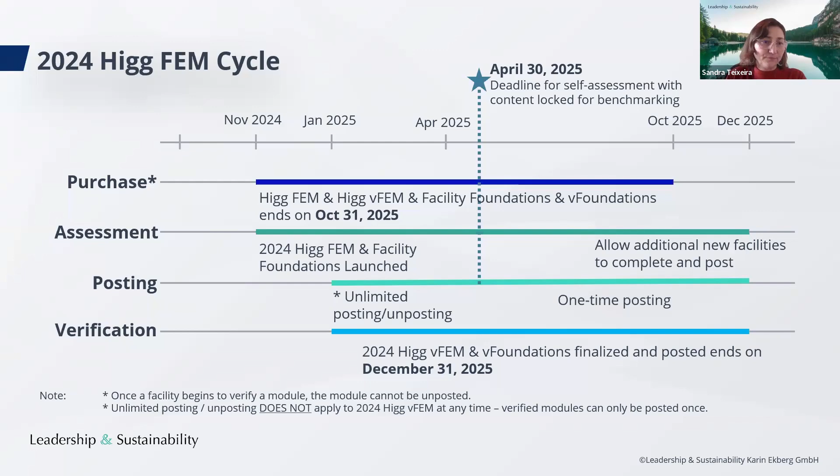So looking into the changes from FEM in the cadence 2023-2024, new changes in the Higg Facility Environmental Module represent a significant step forward in advancing how we measure, report, and improve environmental performance across the textile, apparel, and footwear industries. These updates are designed to refine the assessment process, enhance data accuracy, and align the framework more closely with global sustainability and regulatory expectations.

So we anticipate a collaborative effort in navigating these updates. Looking then into the air emissions section, here we can see the trail overview. We already covered site info and permits, the environmental management system, energy and greenhouse gas emissions, water use, and wastewater, and today's focus will be on air emissions.

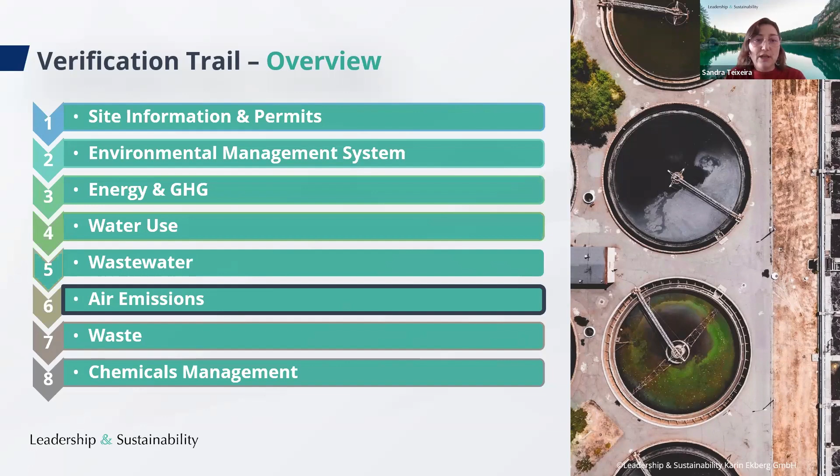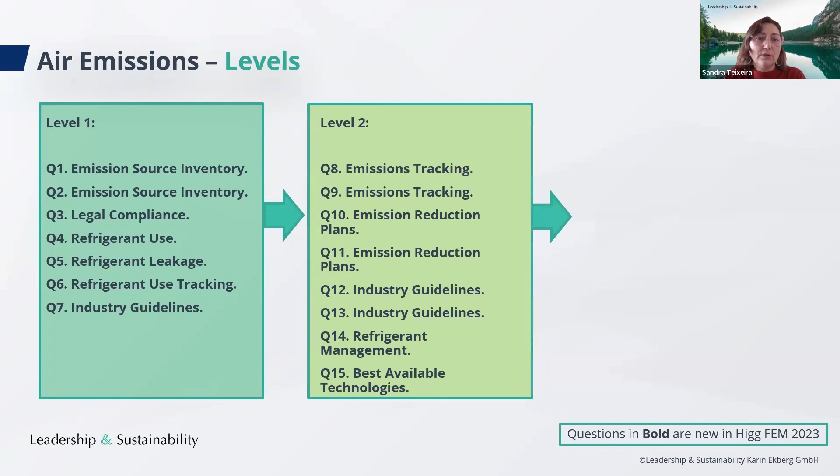As usual, I'm looking into the levels of questions. We have questions distributed by 3 levels: level 1, level 2, and level 3. In the air emissions section, there were no new additions in the cadence 2024. So here the questions that you see highlighted were new adds in the cadence 2023.

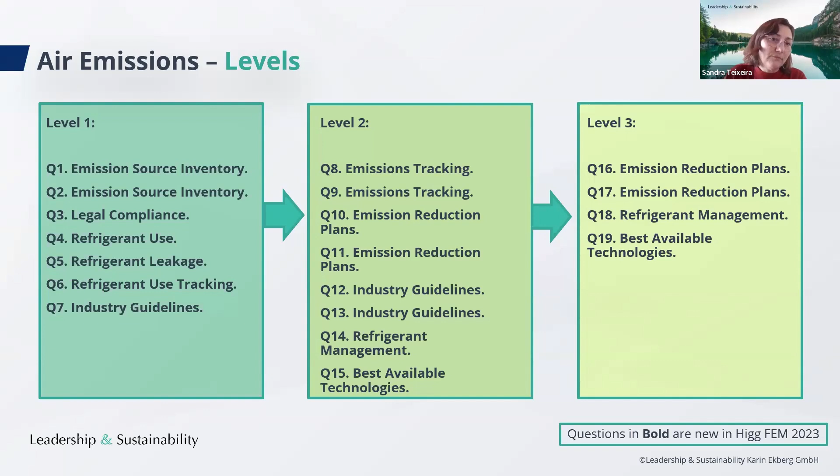As an introduction, air emissions from industrial processes and manufacturing operations have the potential to emit pollutants into the air that impact the environment, human health, and contribute to climate change. By proactively managing and working to reduce the impact of your facility's air emissions, you can reduce your exposure to regulatory risks or new requirements from business partners.

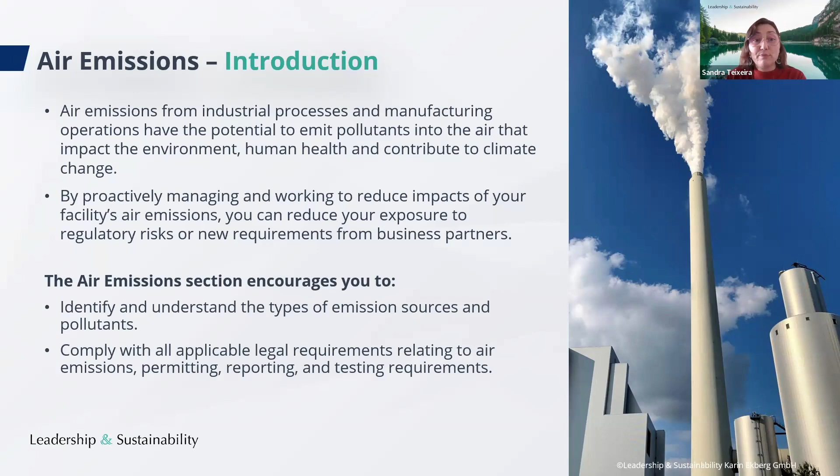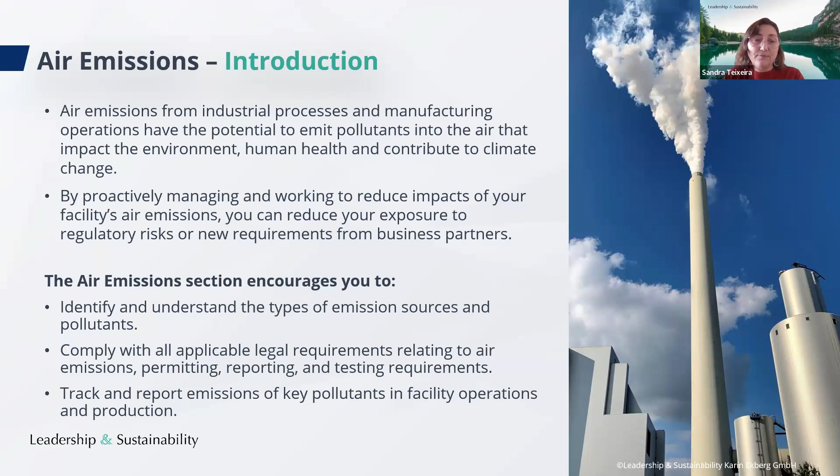The air emissions section encourages you to identify and understand the types of air emissions and sources of pollutants, comply with all applicable legal requirements relating to air emissions, permitting, reporting, and testing requirements, track and report emissions of key pollutants in facility operations and production, and adopt the best available technologies, including materials, processes, and equipment, to minimize emissions to air.

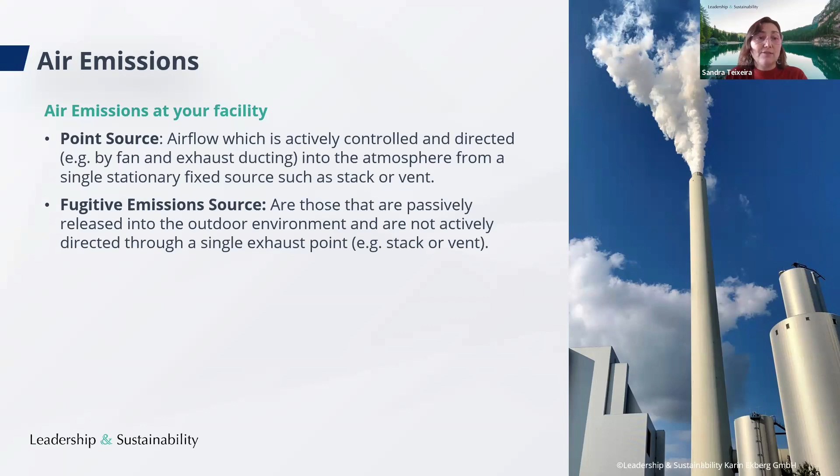Regarding emissions at your facility, you can have point source emissions, which are airflow actively controlled and directed by a fan or exhaust ducting into the atmosphere from a single stationary fixed source, such as a stack or vent. Also, you have fugitive emission sources, which are those passively released into the outdoor environment and not actively directed through a single exhaust point like stacks or vents.

Also, you have mobile emission sources, which are non-stationary sources of emissions, like motor vehicles, heavy machinery, and small engines, including forklift trucks and passenger vehicles.

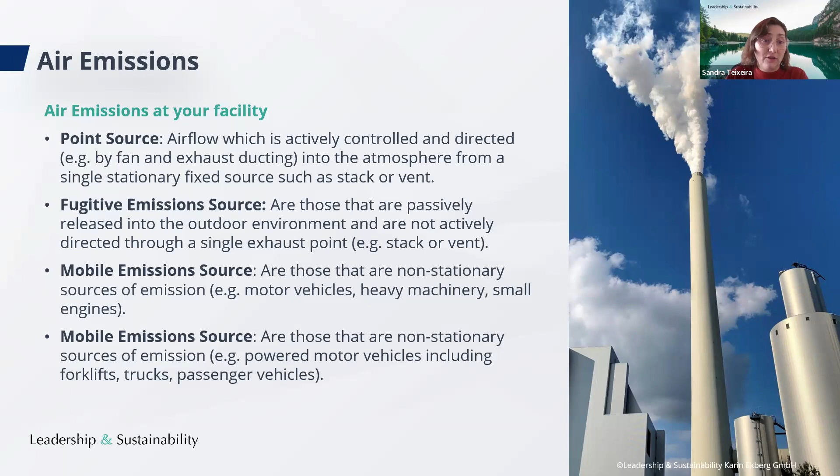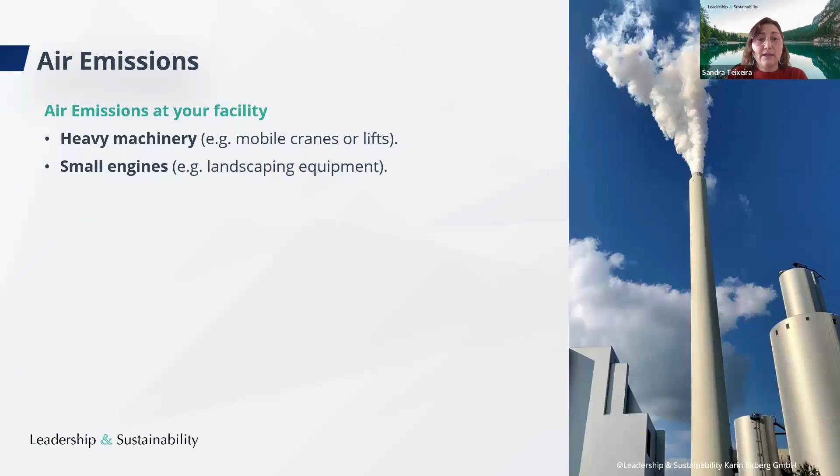Also heavy machinery like mobile cranes or lifts, small engines like landscaping equipment, and air emissions that you have in your facility. Further, it categorizes the emissions based on the nature of the emission sources, starting with emissions from facility operations, which include emissions from sources that support facility operations and are not a direct result of production processes.

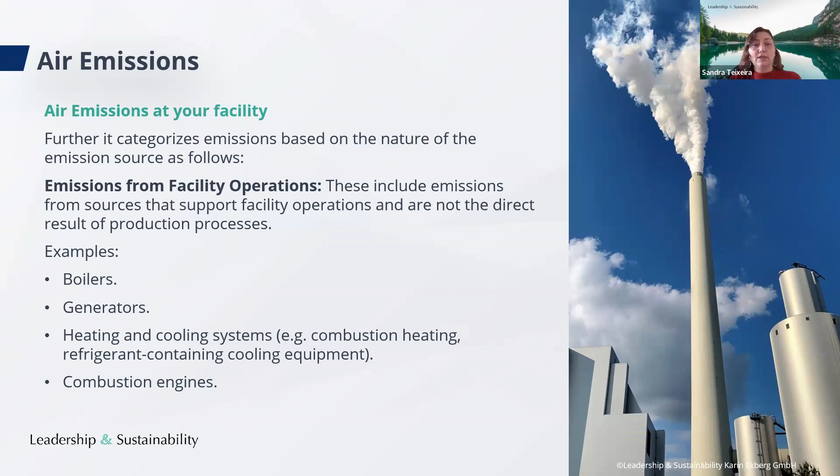As examples, we have boilers, generators, heating and cooling systems, combustion heating, refrigerant containing and cooling equipment, and combustion engines also.

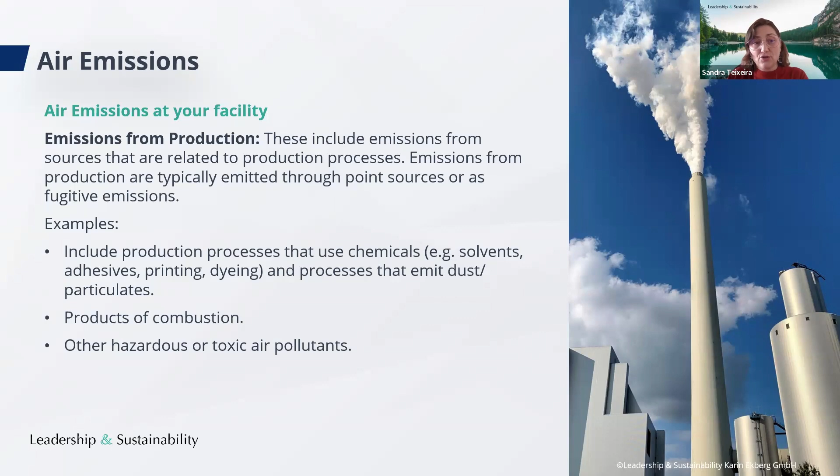Also, emissions from production - this includes emissions from sources that are related to production processes. Emissions from production are typically emitted through point sources or as fugitive emissions. Examples include production processes that use chemicals, solvents, adhesives, printing, dyeing, and processes that emit dust or particles, products of combustion, and other hazardous or toxic air pollutants.

Here we can see the pollutants emitted from operations: particulate matter, nitrogen oxide, sulfur oxides, carbon monoxide, volatile organic compounds or total organic carbon compounds, hazardous or toxic air pollutants, and pollutants emitted from production processes.

You also have particulate matters, nitrogen oxide, sulfur oxides, carbon monoxide, volatile organic compounds or total organic carbon, hazardous or toxic air pollutants, ammonia, ozone depleting substances, carbon disulfide, and hydrogen sulfide.

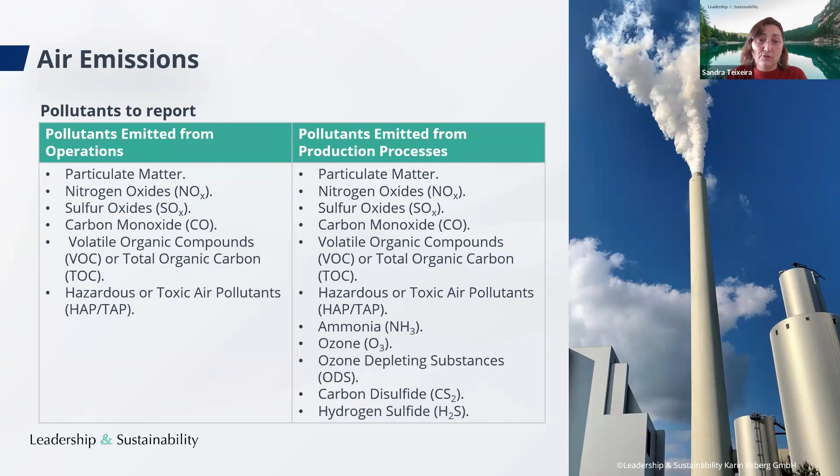Looking at the best available technologies - best available technologies are defined as the most effective and advanced technology, materials, process and equipment available that will result in reduction of pollutants emitted.

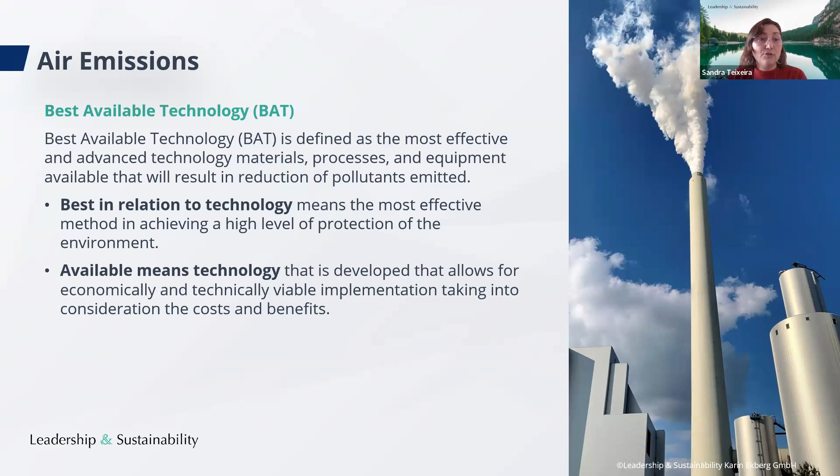'Best' in relation to technology means the most effective methodology in achieving a high level of protection of the environment. 'Available' means technology that is developed that allows for economical and technical viable implementation, taking into consideration the costs and benefits. Also, technology refers to materials, process, and equipment, and the way it is designed, built, maintained, and operated.

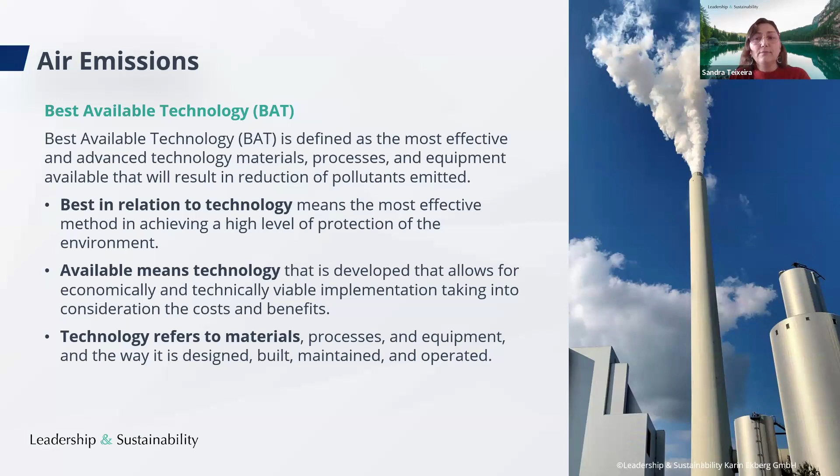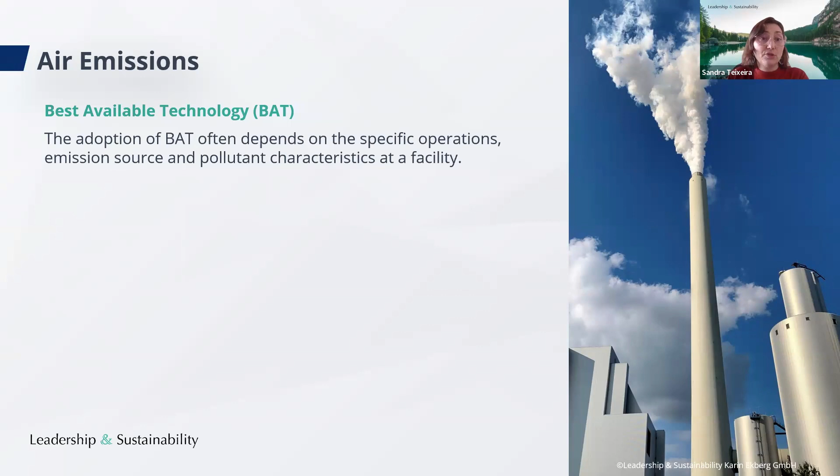The adoption of best available technologies often depends on the specific operations, emission source, and pollutant characteristics at your facility. For example, in some cases the most effective current solution for reducing particle emissions may be an electrostatic precipitator, and in other cases a form of wet scrubbing or cyclone filtration may be more effective.

So in all cases, you need to consider your specifications. In some cases, the most effective current solution for reducing emissions of organic compounds, like formaldehyde, may be substitution for an alternative chemical input, or the use of a control technology such as thermal oxidation.

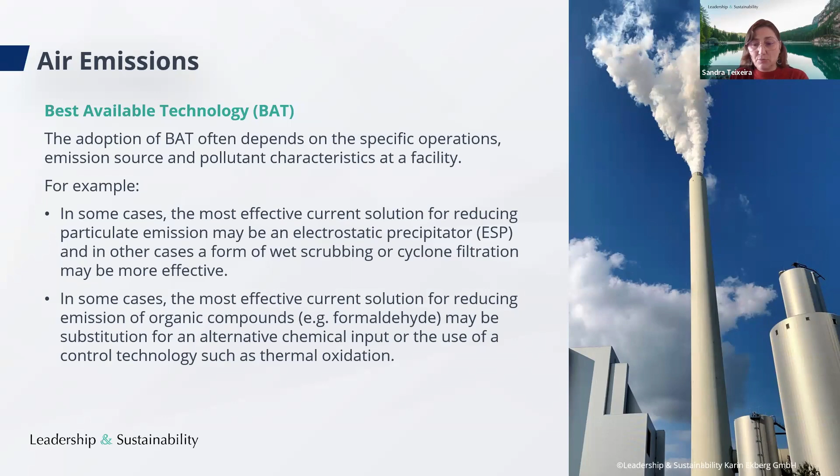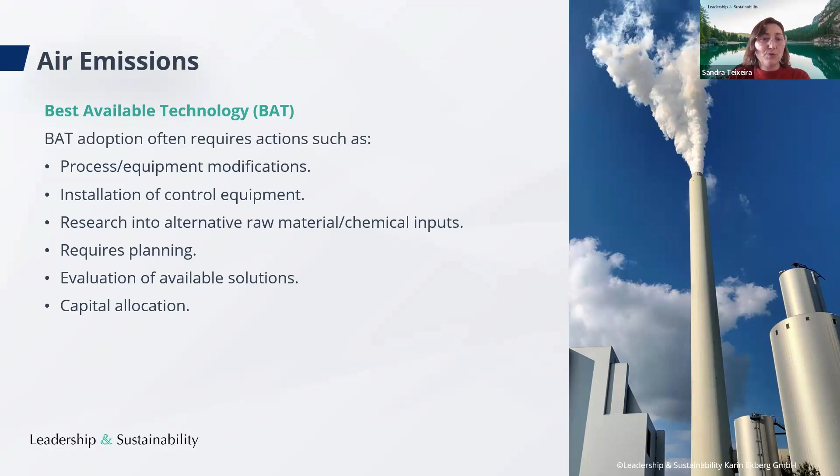Also, best available technology adoption often requires actions such as process or equipment modifications, installation of control equipment, research into alternative raw materials or chemical inputs, planning, evaluating of available solutions, and capital allocation.

As a summary of the new questions and comments: if you have facility operation or production air emissions, then you need to complete the air emission section. You don't need to complete the air emission sections if you don't have air emission points.

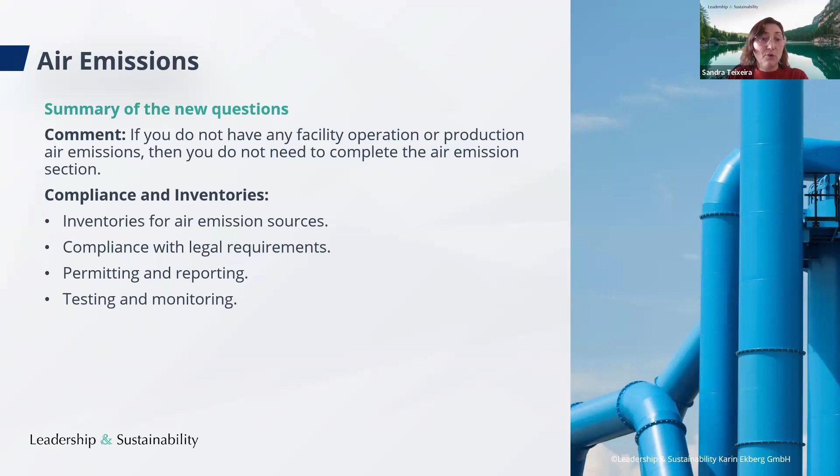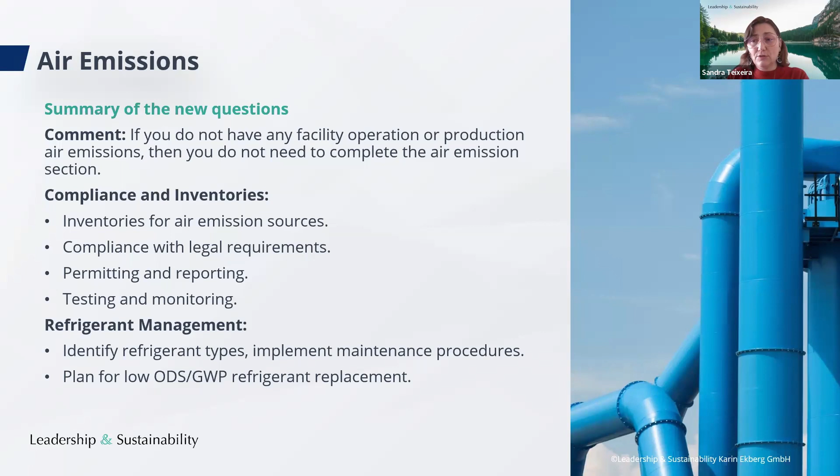But consider the compliance and inventories - the inventories for all air emission sources, compliance with legal requirements, the permitting and reporting, and the testing and monitoring, and refrigerant management: identify the refrigerant types, implement the maintenance procedures, and plan for low ODS or GWP refrigerant replacement. This is what you should consider in case you have air emissions at your facility.

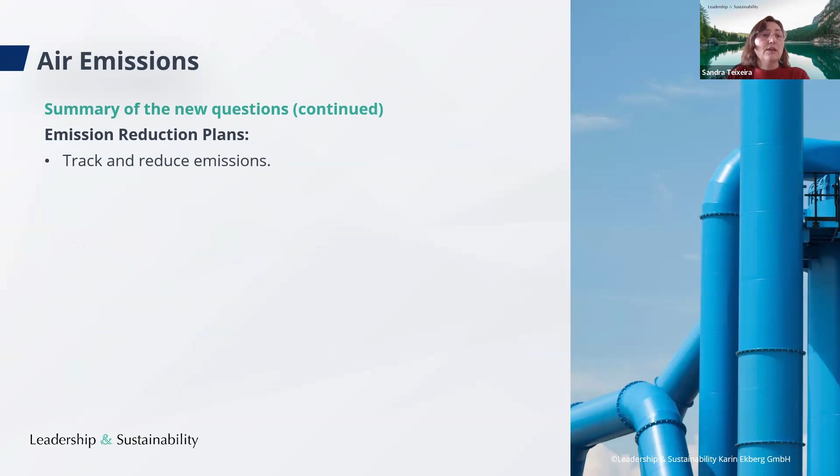And also have emission reduction plans, like track and reduce emissions, and use best available technologies, like adopting industry guidelines and utilizing BAT for emission reduction.

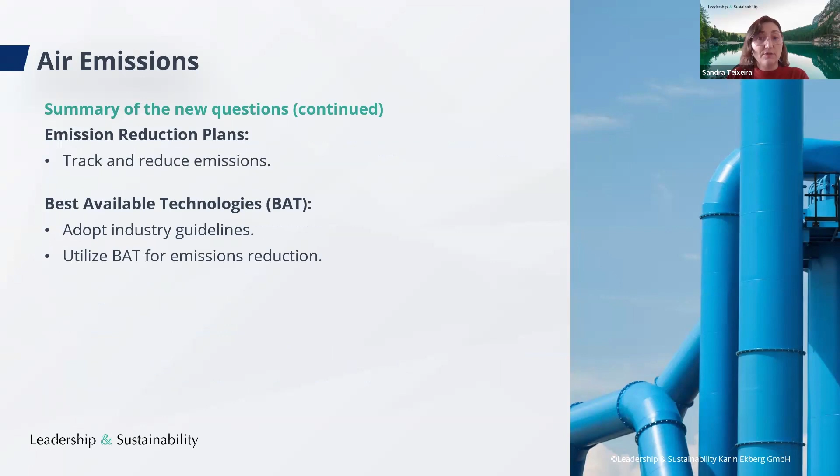And here now we are going into our level 1 questions and an example that we have selected for today.

For the air emission source inventory, as your facility creates an inventory for all point source air emission sources at your facility, does your facility's point source air emissions inventory include: unique source identifier, emission point name or number, the process or equipment the source is linked to, a list of the pollutants emitted from that source, the legal or other emission testing or reporting requirements if required, testing parameters and frequency if applicable, and control devices installed on your source if applicable?

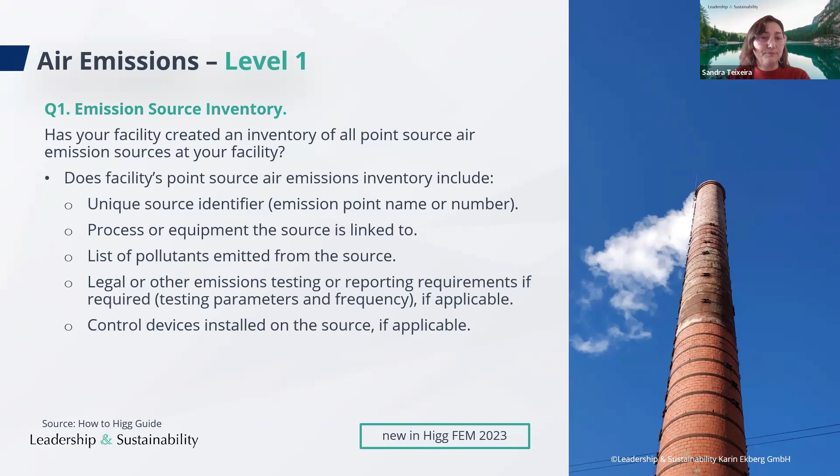As for question 1, as suggested uploads or documents that will support your answers, a copy of the facility inventory of point source air emission sources should be uploaded in the system.

Question 3 is regarding legal compliance: is your facility in compliance with all applicable legal requirements relating to air emissions, including all permitting, reporting, and testing requirements? If no, does your facility have an action plan to address the non-compliance?

Upload the action plan to correct the non-compliance. If you cannot upload a copy, please describe the action plan. As suggested uploads for this question, the action plan to address the non-compliance, if it is no, is selected. To the main question, please upload the action plan to correct the non-compliance.

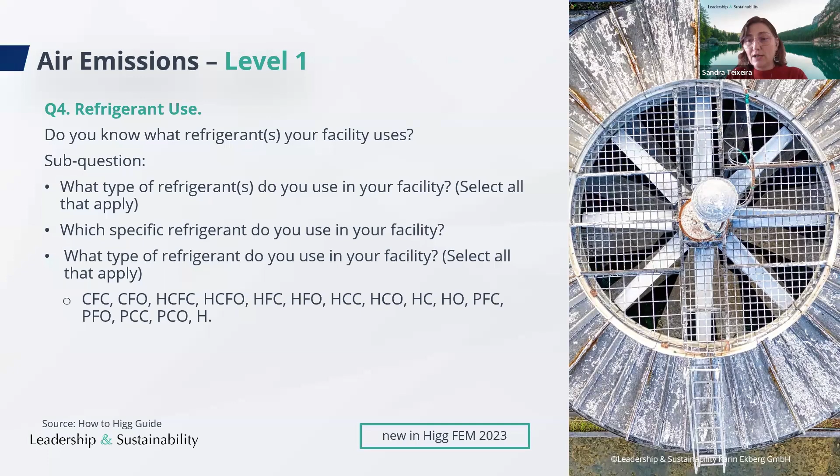Question 4 is related to refrigerants use. Do you know what refrigerants your facility uses? As a sub-question, what type of refrigerants do you use in your facility? You should select all that are applicable. Which specific refrigerants do you use in your facility? Select all that applies. Here you see all the options that will appear in Worldly, and you should select the ones that you are using at your facility or are applicable to you.

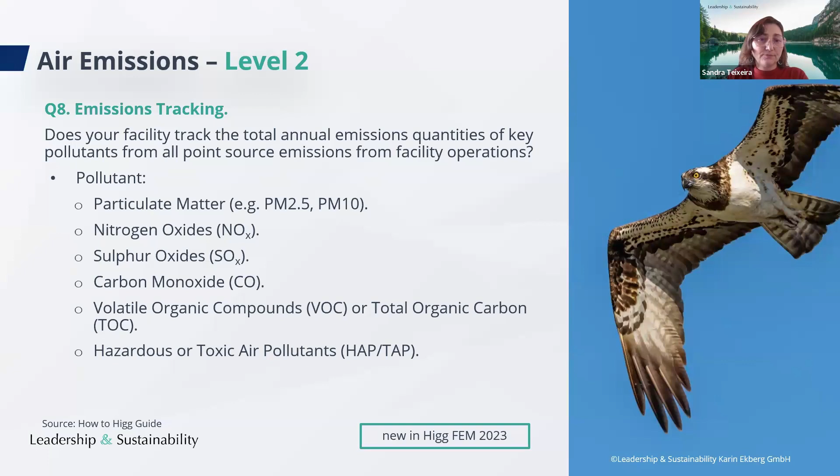Question 8, also related to emission tracking for level 2: Is this pollutant emitted from the facility? Is the pollutant regulated by a government agency? Was the total annual emission quantity calculated for the reporting year? What is your annual emission quantity in kilograms of the pollutant? And the methodology used to determine the annual emission quantity.

Now we are going into level 3 questions and emission reduction plans. Has your facility made progress on its implementation plan to reduce air emissions from facility operations in the reporting year?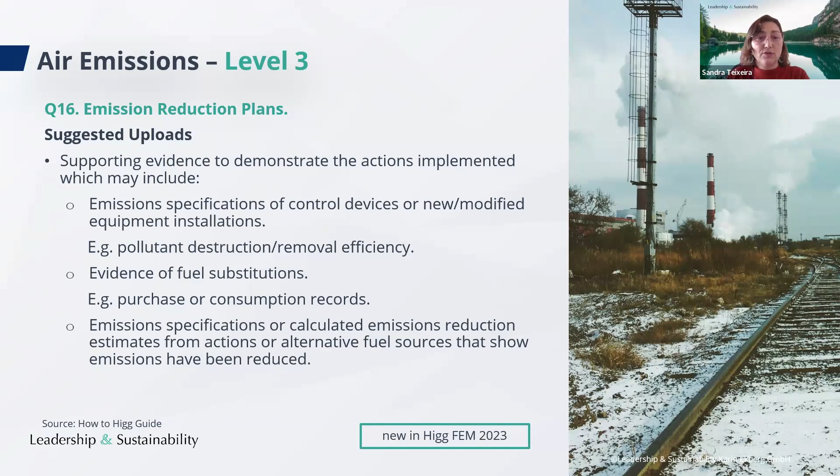The suggested uploads for this question are supporting evidence to demonstrate the actions implemented, which may include the emission specification of control devices for new or modified equipment installations, the pollutant destruction or removal efficiency, evidence of fuel substitutions, and purchase or consumption records, emission specifications, or calculated emissions reduction estimates from actions or alternative fuel sources that show emissions have been reduced.

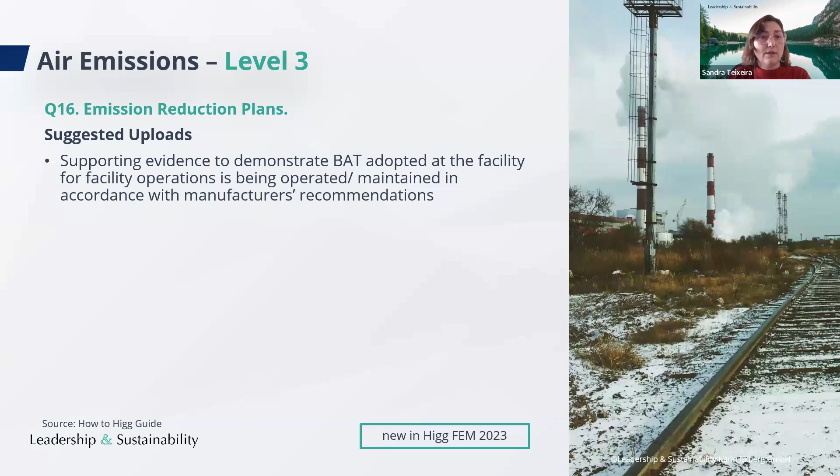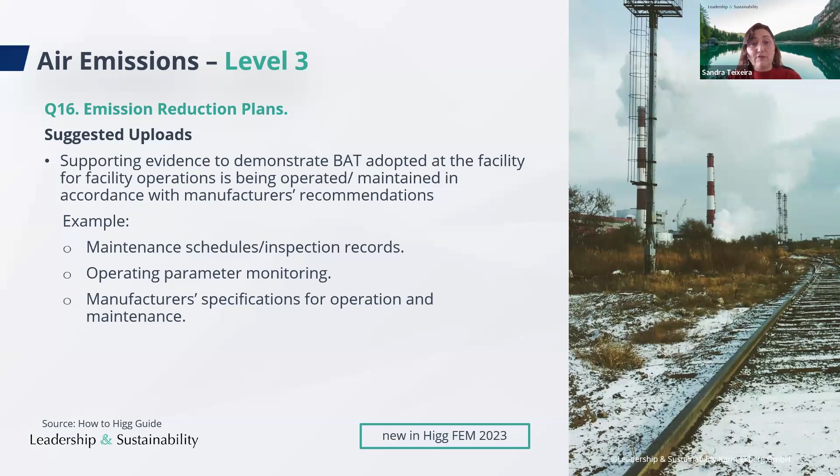As suggested uploads for this question, we have supporting evidence to demonstrate the adoption of best available technologies at your facility operations, and that it is being operated and maintained in accordance with manufacturers' recommendations. Examples include maintenance schedules, inspection records, operating parameters, and monitoring the manufacturer specifications for operations and maintenance.

And this is what we have prepared for today's session regarding air emissions.